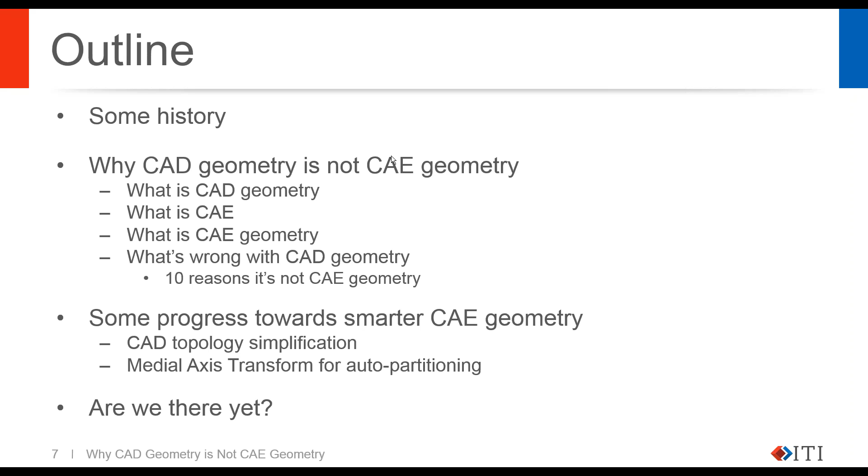Okay, so I've broken today's webinar into two parts. There's a mildly depressing first half where we'll go through all the problems that CAD geometry causes us, and I'll try to elaborate some of the reasons why. And then the second half will be a bit more uplifting, where I'm going to pick a couple of the areas of research and development that we're doing in CADfix to try and address some of these issues with CAD geometry.

And there's a lot of clues in the name there, because back in those days, a lot of the simulation was done in a single package. The modeling of the geometry was done in the same tool that was actually doing the mesh generation. And so in those days, CADfix was really quite good at creating very complex hex dominant meshes of geometries, as you can see on the screen here.

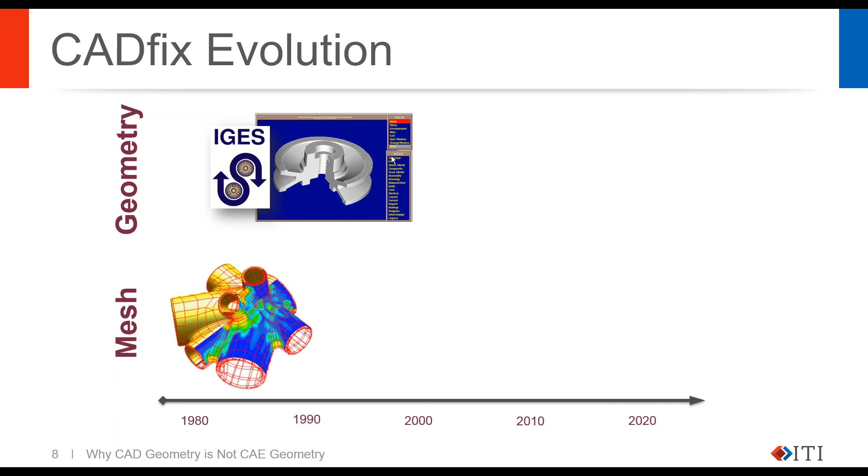But around the end of the 80s, early 90s, commercial CAD systems really started to take off, and geometry started to be created outside the simulation environment, and people were receiving geometry as IGES files or as native CAD geometry, and they had to do the simulation on this much more complex geometry. So the highly structured hex dominant meshing we were really focused on back in the 80s becomes very difficult to do as the complexity of the model goes up.

And so the industry as a whole tackled this complexity issue by switching over to automatic tetrahedral meshing for a lot of structural simulation. And so we did the same thing. We introduced tet meshing within our tools, but a lot of other tools were also coming into the market at this time offering automatic tet meshing. It was quite a straightforward technology to develop, and so we were starting to lose out on that front.

But what we had noticed during those years was that as CAD geometry became more and more prevalent, the quality of the CAD geometry was becoming an issue, and not just the complexity of it, but actually the integrity of it in the early years. And so at about the end of the 90s, we took a strategic decision within the company to change the direction of our product and switch over to more of a geometry focus. Initially, it was focused on developing algorithms for cleaning, healing and repairing CAD geometry to enable you to translate it or move it between different CAD systems.

But as years went on, the CAD systems improved that translation themselves. Their exports became better. STEP as a format came along. That removed a lot of the issues with translation. And so we started to decide what to do next. We still had this eye on the simulation market, and we could still see the simulation engineers were struggling with the geometry. Even though it was cleaner and they could get it into their system, they were still struggling to actually do the simulation. And at that point, we decided to invest in several strategic geometric algorithms.

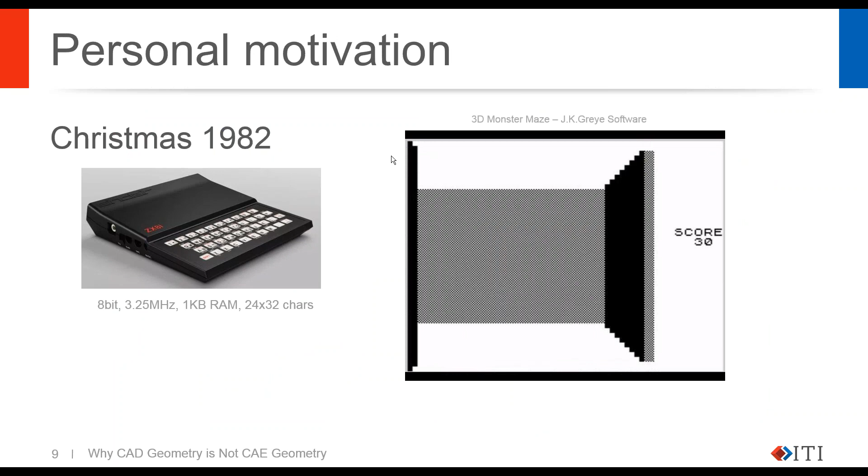Personally, I think my interest in 3D geometry and simulation I can trace back to Christmas 1982 when I got this, my first computer there, you can see on the left, and a game, 3D Monster Maze. And you can see that little animation on the right-hand side there. So that really sort of fired up my 15-year-old mind and really got me wondering, well, if computers can think in 3D, just what's the hardest question they could answer for me? And that really started my career in sort of geometry engineering and trying to get computers to do hard things. Okay, so that's a bit of a background.

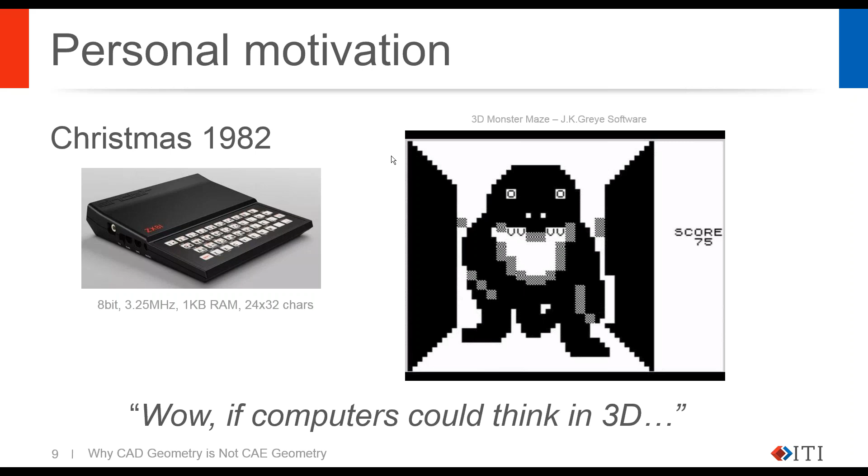So looking at the structure of the webinar, as I said, I've broken it into these two sections, and we'll have a poll in the middle where we can assess the first half and get your feedback on that. So before I sort of launch into describing the detail of the CAD geometry, I need to explain some of the terminology I'm going to be using here.

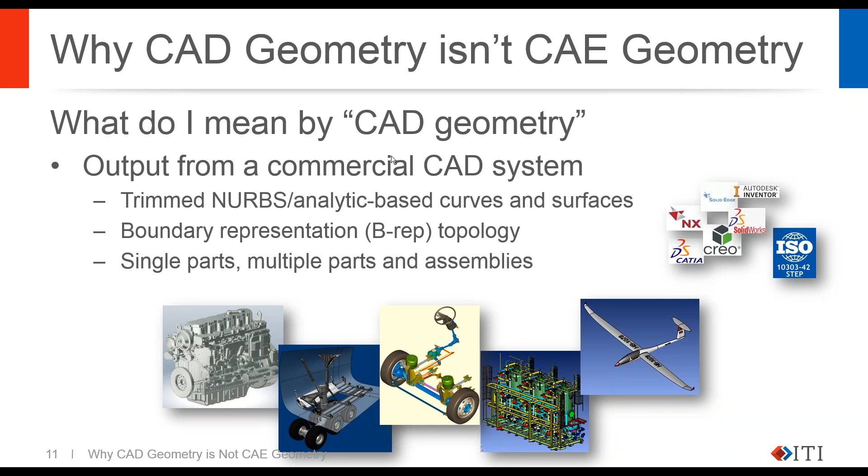So starting with the CAD geometry, what do I mean by CAD geometry? So for this webinar, I'm really talking about the sort of output you get from commercial CAD systems like CATIA, NX. So it's typically trimmed NURBS surfaces, curves. It uses a boundary representation to define the geometry. You find it in single parts, multiple parts, or very complex assemblies. So this is what I'm calling CAD geometry for this webinar.

Just to show what isn't CAD geometry for this webinar, because there are other alternative forms of geometry. So faceted surfaces, implicit surfaces, subdivision surfaces, untrimmed splines, and point clouds are all examples of alternative geometry forms that I'm not calling CAD geometry here. So just bear in mind that this is really commercial CAD software geometry that I'm talking about.

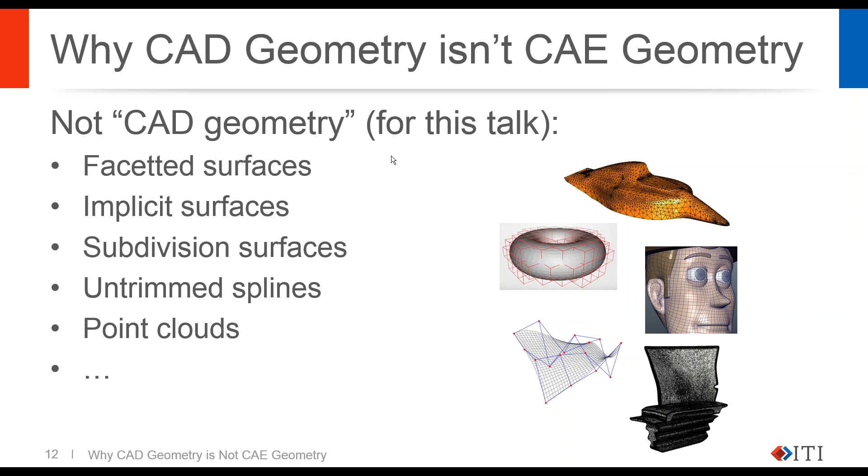So what do I mean by CAE? So this is a bit easier to define. So it's using computers to simulate any laws of physics, so thermal, stress, fluid flow, electromagnetics, and so on. So they all have this common theme that they typically start from a 3D geometry definition, and they require some discretization of that geometry in order to solve the physics that they're solving.

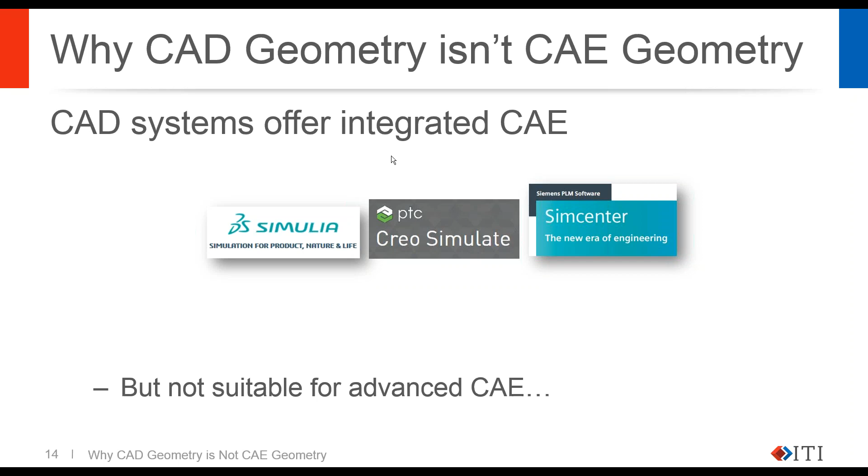So you might be thinking, well, CAD systems already offer an integrated CAE capability. So you can do some simulations within a lot of CAD systems. So I'm not talking about that sort of CAE here. I'm really talking about advanced CAE as being the thing that's suffering from this geometry. So what do I mean by advanced CAE? So I'm talking about any sort of CAE that's currently limited by either human resources or compute resources.

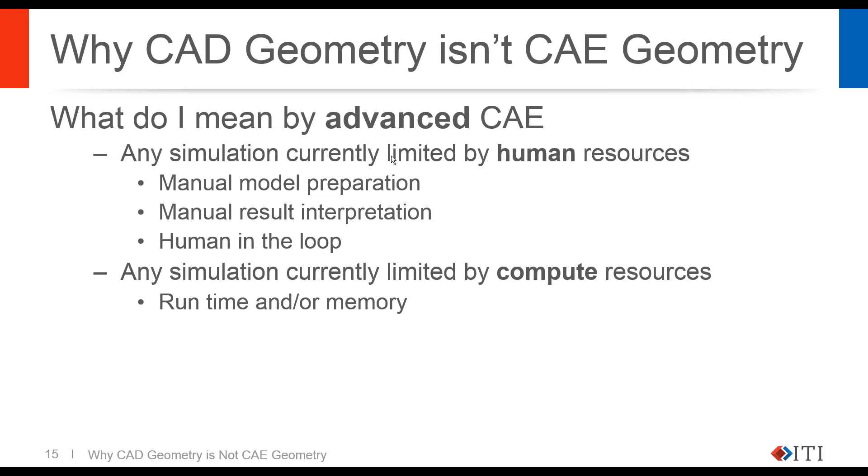So by human resources, I mean simulations that still involve a significant amount of human effort to prepare the model, so cleaning the geometry, meshing the geometry, or human effort to actually interpret the results and influence the design by interpreting the results of a simulation, or any other thing that involves some human being in the loop. On the compute resources, this is a bit easier. So any sort of simulation that is really currently restricted because it runs too long, it uses up too much memory. So some examples to put this into context. So jet engine failures are a very common example of what I would call advanced CAE.

So trying to simulate the fan blade coming off of the front of the engine, or a bird strike, or in fluid flows, so simulating transonic flow, shock waves, turbulence, or electromagnetics is another example. So trying to simulate lightning strikes, predicting the current flow across and through aircrafts, antenna performance, and so on.

So these are sort of things that I'm calling advanced CAE, and physically this is how they are simulated or tested today with expensive physical tests. A fan blade off on the left there, wind tunnel on the right for the fluid flow, some sort of electromagnetic test environment there on the bottom picture.

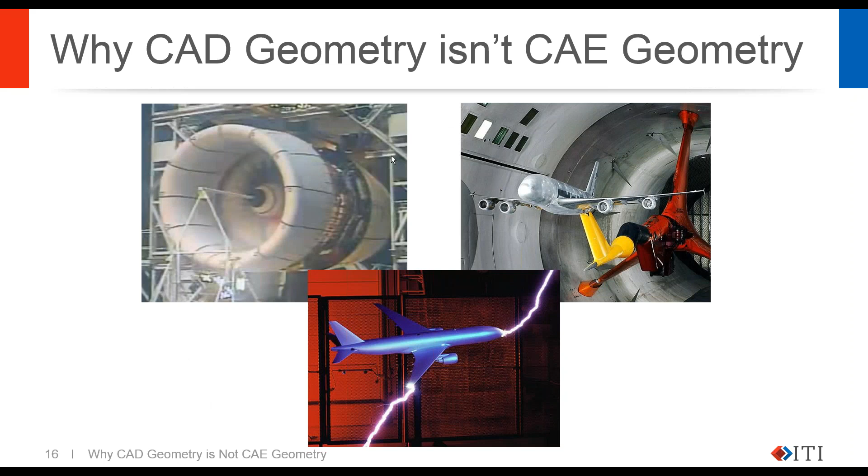So these all can be tackled today. There are solutions and simulations going on for these things, but they fail my criteria in that they're either limited by human resources. So, for example, the fan blade off model on the left there can take many weeks to actually produce an efficient model you can actually run for that simulation. And some of the CFD tools are pushing the limits of machine memory and storage and so on. So they are tackled, but they're not tackled to the level we actually want.

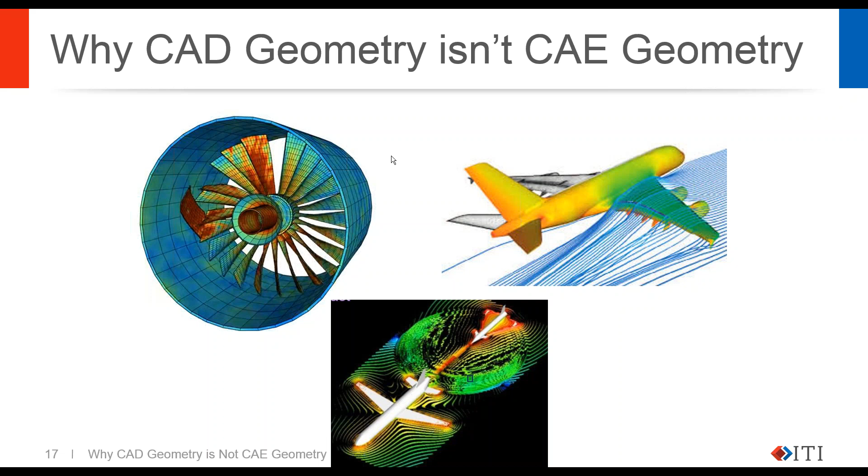Okay, so what do I mean by CAE geometry then? So CAE geometry is geometry that enables fast and efficient mesh generation. So there's a discretization problem that is common across all CAE. So this is the obvious requirement for a CAE geometry, is it has to enable meshing to be done very efficiently. But there's two other aspects of my CAE geometry that are important.

So adaptive mesh refinement is becoming a more important aspect of solvers these days, being able to modify the mesh as the solver converges on a solution. So in order to do that, you need to have the mesh coupled with the CAD so that you can actually refine the mesh directly on the exact CAD geometry. So that connection is a really important aspect of CAE geometry.

And lastly, once you've performed some simulation, you have some results in a mesh format, you need to be able to get this back into a CAD system for either manufacturing or for sharing through other workflows that typically expect to start from a CAD definition of the geometry. So true CAE geometry has to be able to satisfy these three criteria. Okay, so those are the terms defined.

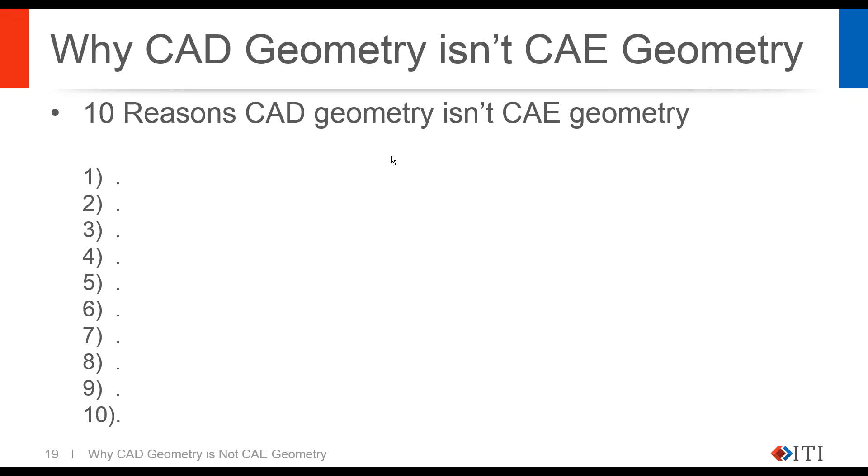So if we now start to move on to why is CAD geometry not CAE geometry, I've identified 10 issues here. But before I got started, I realized that actually there was an underlying issue, a zeroth issue that myself and others probably take for granted when they talk about working with CAD geometry, and that's that it's not geometrically watertight. So the way that the CAD solids are created today, they're defined as a patchwork of trimmed surfaces.

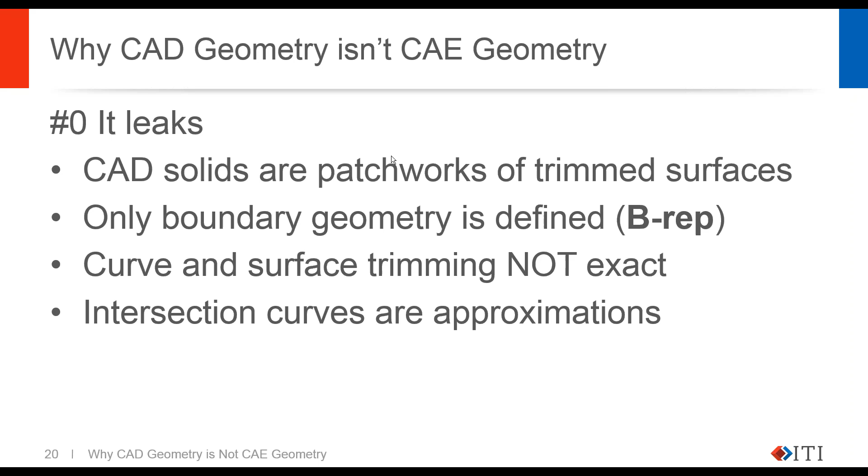So individual surfaces are stitched together to give you this sort of outer shell of your solid, and this sort of stitching process is not exact. So there are approximations involved in the intersections between surfaces, the trimming of surfaces and curves. So the end result is that the geometry is held together by a tolerancing system in one form or another. So it varies from CAD system to CAD system. But all these sort of junctions and joints between faces, they're held together by some tolerance or other.

So this is sort of an underlying problem, which for mesh generation you might not think is an issue, but actually when you start getting down to making very, very fine meshes, you can start to fall into the realms of these tolerances, and then your geometry starts to look a bit more like this from a meshing algorithm. So there are clear gaps start to appear between faces that your meshing algorithms then start to fall into and trip over and so on.

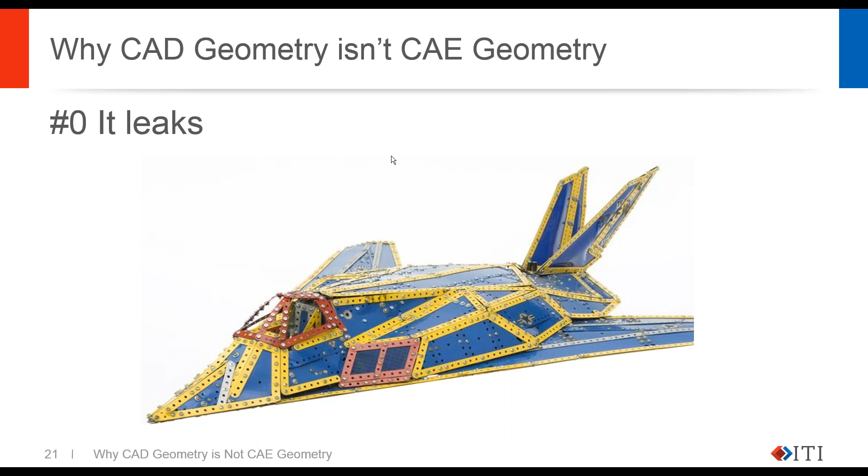So just bear this in mind as we go through the next problems, that this is underlying all of them, this robustness of the whole CAD representation. Okay, so moving on to number one, the first problem we've got. So I'm calling it a dumb solid.

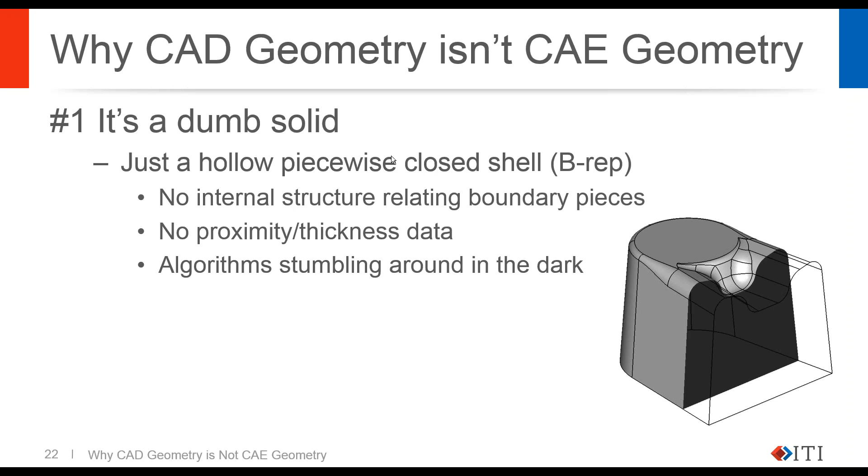By this I mean that the geometry of a CAD solid is only defined on the skin. So we only have curves and surfaces defining the outer boundary of your solid. CAD solids don't give you any information about the shape of the interior, the proximity of various parts. So if you're writing algorithms to walk around on the interior of a solid, then they're typically stumbling around in this dark area with only the outer surfaces to work with.

So this is a problem for CAE when you come to discretizing or meshing volumes, which is a very key activity. And algorithms that need to discover proximity do it in a very clumsy or expensive way by touch. So by firing rays, by detecting when collisions occur in the meshing process. So here's an example of this and how it affects the meshing quality.

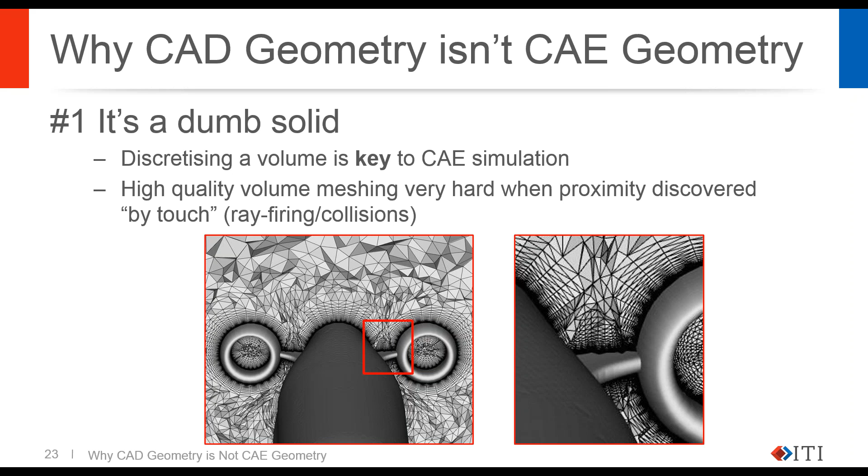And so typically you end up with some sort of compromise in the mesh where the structured mesh you want stops, and then this lower quality unstructured mesh leaks in to fill the gaps. So that's an example of the missing proximity, the fact that the solid is really quite a dumb solid.

So for these 10 problems, I'm going to highlight what I'm calling a CAE geometry challenge, this little red line at the bottom of the screen here. I'm going to pull these out, and we'll use them at the end to summarize the issues causing problems with the CAE geometry. So for this one, we need to have smarter proximity reasoning for CAD solids. We need better than just walking around the skin and firing rays to tell us where the thickness is and where the proximity is. Okay, so that's number one.

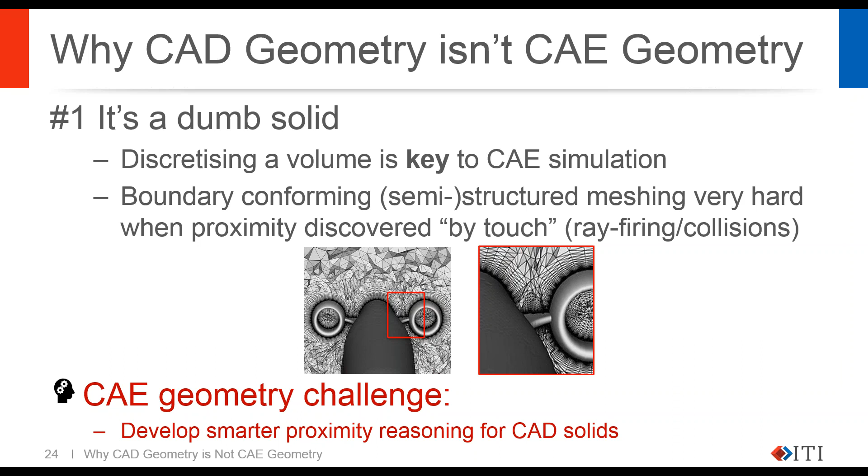So why does this happen? Why do we get this coming from the CAD systems? So there's a couple of reasons.

One of them is sort of going back to the way CAD systems interface with humans, and they tend to replicate the sort of human machining operations that we're all familiar with, so extruding, cutting, sweeping, rounding, and so on. And they allow you to compound these things together, so you can overlay all sorts of operations one on top of the other. And that is one reason why you end up with a lot of complexity in the skin, because of all the overlaps and interactions of these operations.

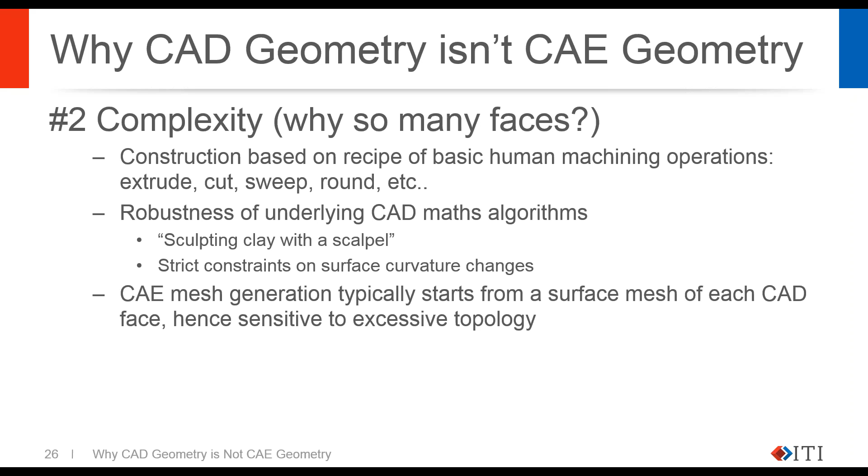And as I was saying, they influence the CAE process because of the mesh generation of the skin, often being very badly affected by the way that the skin is defined. So I can see a couple of challenges coming out of this particular problem. So being able to automatically simplify CAD geometry. That's something we've been doing with CADfix for many years, allowing our users to join these faces, collapse small edges and so on.

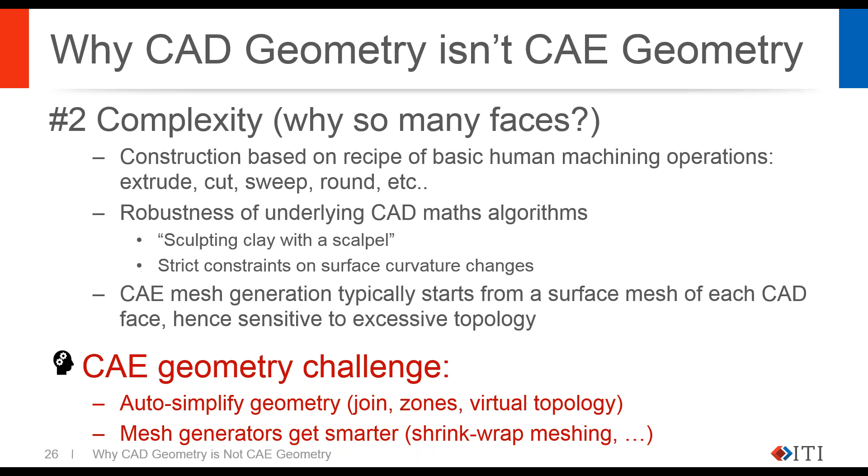And also we're now moving into non-destructive ways of simplifying the CAD geometry, so virtual topology, for example. So that's one way we can modify the CAD geometry. The second way we could do this is to actually make the mesh generators smarter, to actually get them to ignore a lot of these sub-resolution features, just automatically mesh over them. So two challenges from this one.

You have to extract that. You have to derive it from this very complex collection of bodies that are in contact. Some of them may be actually penetrating. Some of them actually have small air gaps between them, so it becomes very difficult to actually extract the geometry you want for your simulation.

Another example, given a single body, the body is represented in the metal, but you actually want to do the simulation of the airflow. So again, the actual geometry that you need to mesh isn't actually part of the CAD model. It's something you have to derive from that. So the challenge from this one is an automatic domain geometry extraction facility for very complex parts and assemblies.

Number four, the CAD geometry can be too realistic. This typically happens in CAD models that are very close to the end of their life. They're down at the manufacturing level where they're being produced primarily to drive the manufacturing process. And so typically they collect a lot of realism. They collect a lot of nuts and bolts and company logos and instructions, and very small, high fidelity realism features creep into this.

But they can cause big problems for the mesh generators, because they typically are below the sort of resolution you need for a simulation, or they're below the resolution you can afford. They would drive too much mesh into your mesh, and so you have to come up with a way of removing these. So there's a couple of ways I can see doing this. Automatically defeaturing the geometry. So again, stuff that we've been working on in CADfix for many years to try and give people tools for identifying and removing this sort of geometry.

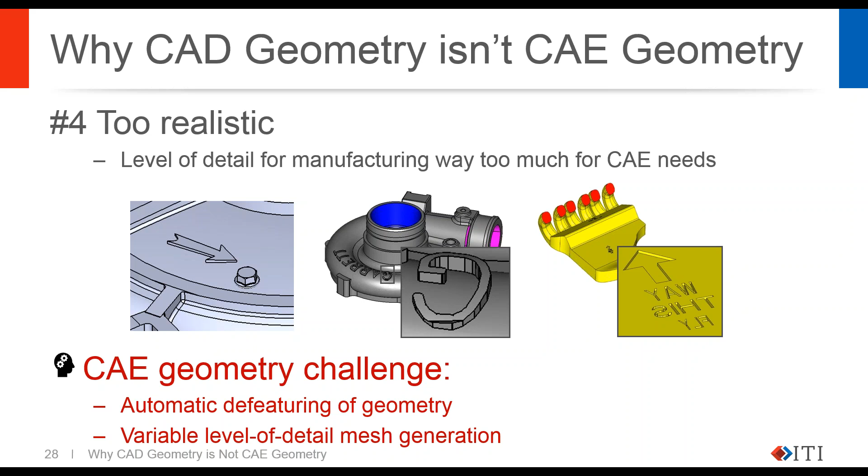The next one is the opposite, really, so too idealistic. This again happens at the other end of the design spectrum, typically with preliminary design models, early design models, where you don't want all that realism because you're not about to manufacture it.

This can cause problems with this sort of feature, where the geometry is constructed from more primitive type features, like cylinders and blocks, that you're gluing together. Because of the lack of nice fillets that give you realism, you end up with unmanufacturable features creeping into the CAD geometry.

The challenge for this one, I think, is really on the doorstep of the mesh generators, because I don't believe the CAD systems are likely to provide tools for this, since this is fundamentally correct - what you see on the screen is what the user asked for. So the mesh generators are the ones that need to cope with this sort of too-idealistic problem.

Okay, number 6, so no idealization. This is a special case where we have geometry that can be simulated much more efficiently if we can approximate it with a mid-surface mesh rather than a complete solid mesh.

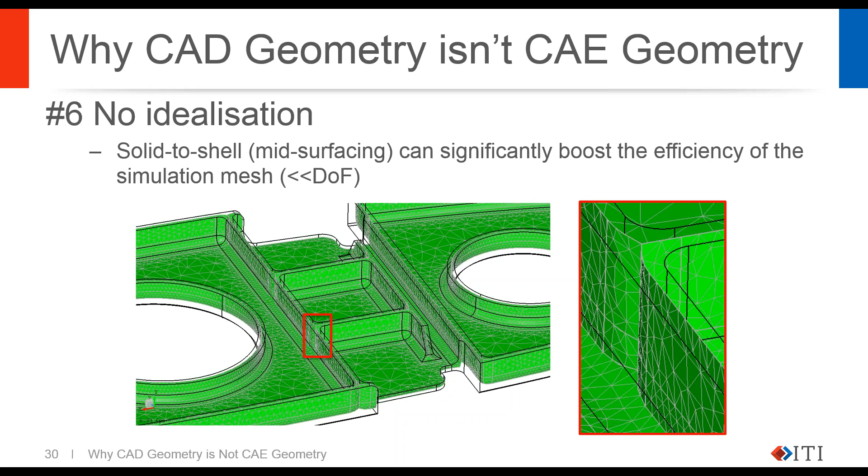The example on the screen here is a thin-walled aerospace component, which you could mesh automatically with TETs, but you'd have a lot of them. If you're able to construct a mid-surface mesh as an approximation, you can get a big speed up in simulation time, and the number of degrees of freedom drops dramatically. So it's a very attractive goal, being able to idealize solids into sheet approximations.

But the trouble comes back to the whole dumb solid problem again, in that CAD solids find it very difficult to reduce complex, or even fairly trivial, thin-walled objects into mid-surface approximations robustly. So there are tools out there that do this semi-manually, allowing users to pick pairs of faces and construct a mid-surface.

The user then has to manually stitch together the mid-surfaces. And where the thickness becomes variable, that becomes quite a challenge to construct a mid-surface. That brings a human back into the loop and breaks the whole optimization goal. So the challenge from number 6 is quite obvious - we need a way of automatically creating robust mid-surface idealizations from CAD solids.

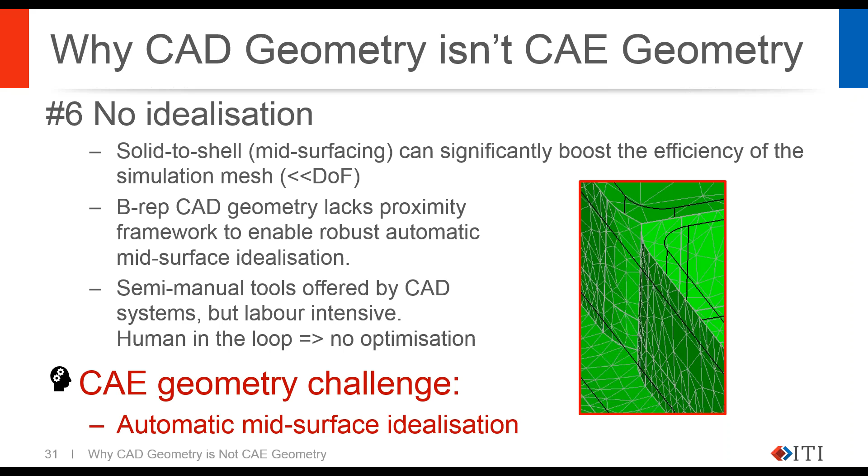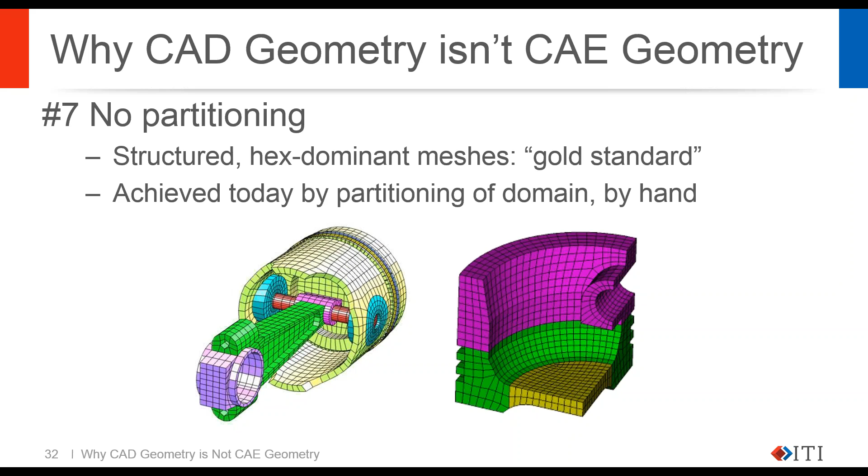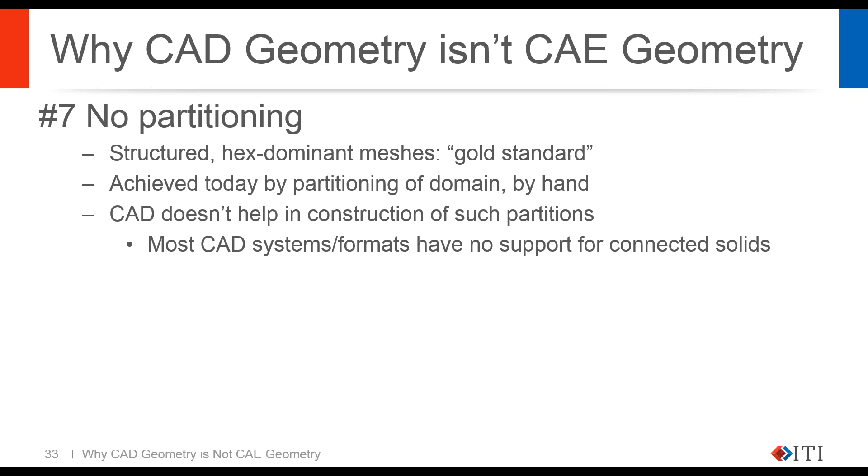So CAD geometry doesn't really support this whole idea of subdividing a single body into lots of little pieces. There's no support for this sort of connected multi-solid representation of a body.

There are specialist tools out there for enabling this subdivision, this blocking of CAD geometry, like ICEM Hexa and Cubit. They're very proficient at allowing users to sketch the blocks and construct this block topology quickly. Again, they're quite labor intensive and bring a human into the loop, so they really rule out any optimization goals you had.

So the challenge coming from this one is that we need to be able to automatically partition complex solids into hex meshable blocks. That's the challenge from this one.

So what we need here is the ability to reparameterize CAD geometry to give it handles, or optimization handles, to allow the optimizers to actually achieve or drive the correct geometrical functions. So if you think of the wetted area of a ship hull, for example, you might want to optimize or minimize the wetted area. That's not a parameter you can control in your CAD geometry, so you can't actually drive that up and down with a solver.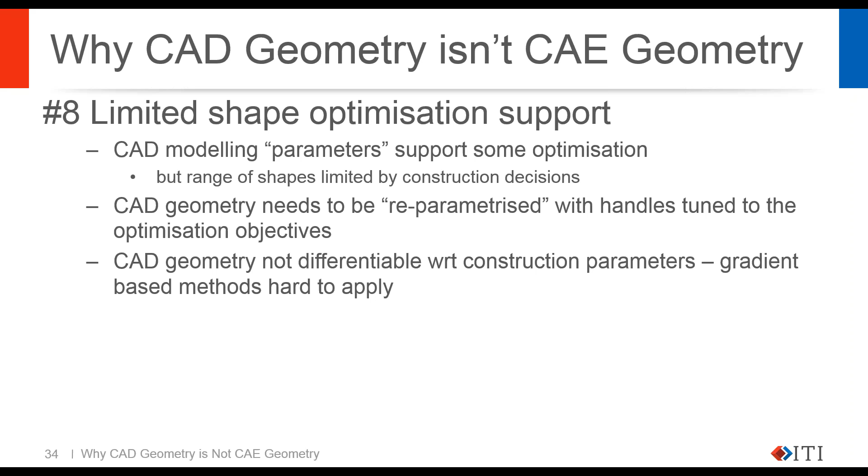Okay, the other sort of shape optimization relies on gradient-based methods, so adjoint techniques for using the relationship between the geometry and the parameters to home in on the optimum shape. So that requires that there is a connection between the derivatives and the mesh and the CAD geometry, and that is typically missing from most CAD geometry. It's another form of being a bit dumb.

So there's a couple of challenges I can see from this one. Being able to reparameterize the CAD model to give it the correct handles for the solver to actually start pushing the geometry around in a way that's going to reveal the optimum shape. And the second one is an adjoint friendly geometry engine, one the solvers can actually use for differentiating the relationship between the solution and geometry.

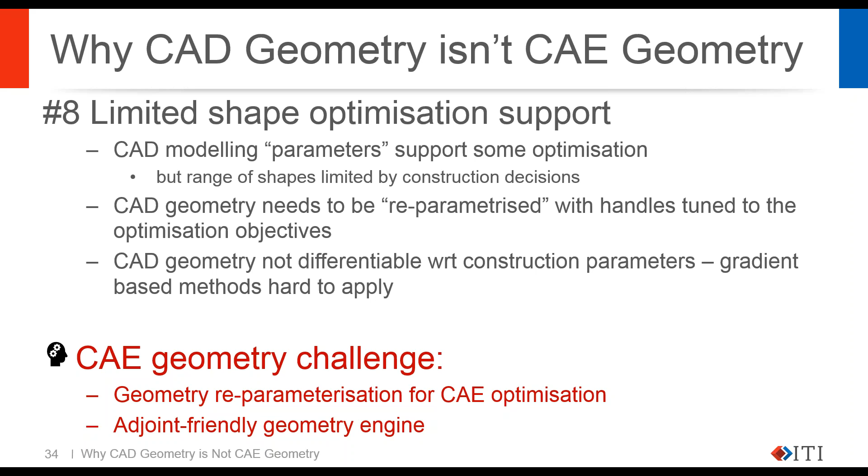So how do you integrate that into some of the more traditional CAE workflows, which are built around CAD geometry? How do you marry them together? So there's a challenge coming out of this one for the integration of scan geometry into our current CAE geometry workflows.

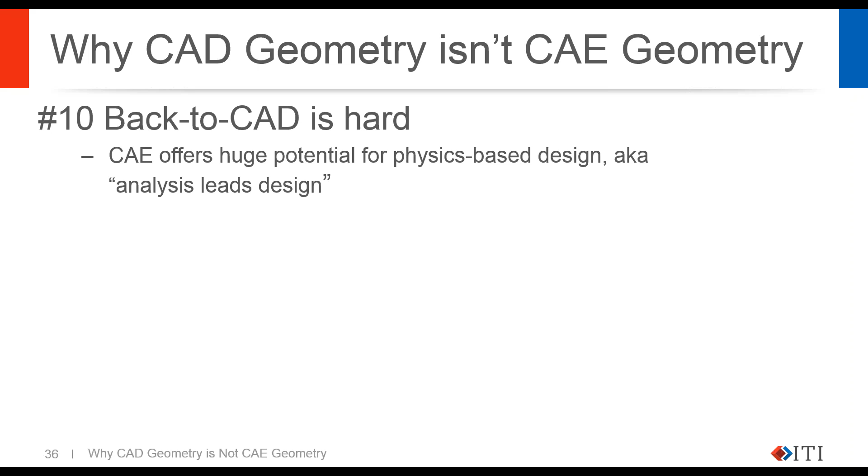So the last one of the ten, this is a back to CAD problem. So this is the shape optimization follow-on. As I was saying, CAE offers huge potential for doing physics-based design, so really homing in on the best design to solve the physics that you're trying to simulate. And that often ends up with very complicated meshes defining that shape.

So for example, on the left here, we have a simulation of a hot-to-cold turbine blade. The turbine blade is simulated in its hot running form, but it's obviously manufactured in a cold form. So you use a simulation to go from hot to cold. But the cold is defined as a mesh, not as a deformed CAD geometry. So there's a problem there. How do you actually turn that cold mesh into geometry that is good enough to put into a CAD system to manufacture?

And on the right-hand side, here's our optimized cooling hole again. The solver has been able to move the mesh around to find the optimum shape for this cooling hole. But how do you get that back into a CAD system again for manufacture, or into a format that you can share with another downstream workflow?

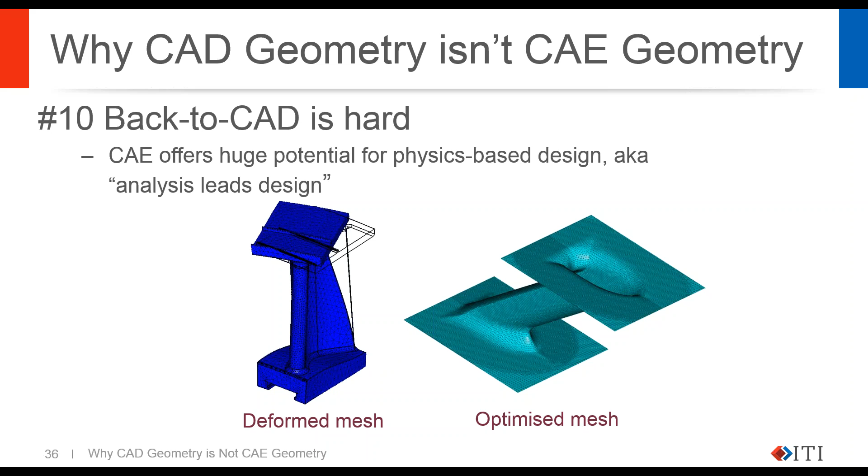Okay, so the problem here is that the simulation tools produce optimum shapes in mesh. They don't talk CAD BREP. They can't actually construct a BREP to describe their optimum shape. But CAD BREPs are the common denominator. They're the thing that allows you to exchange your designs very easily.

So there are a couple of challenges here I see. The first one, the hot-to-cold problem, you could imagine you've got a CAD geometry that's almost the right shape. So being able to actually just morph the CAD geometry to match the mesh is one challenge. But then in the other case where you have a very radically different shape, then you need to be able to construct valid CAD geometry from the mesh directly.

So there's a couple of challenges coming out of this one. That's the 10 issues with CAD geometry and why it's not CAE geometry.

Summarizing those, of all the challenges I pulled out, there's 13 of them across all those problems listed here. So I picked out 5 of them as ones that are particularly top priority for us at CADfix, and some of these I'm going to be talking about in the second half of the webinar.

But I think at this point, Marco is going to launch a poll to see if we can get some feedback on the relevance of these challenges. Yeah, let's get our audience engaged here. I'm going to launch a poll. Go ahead and get that on the screen.

Here you go. What we'd like you to do is, from the 5 top challenges that Mark identified, pick the one that's most important to you out of this list. And if you really have a pressing challenge that we didn't consider in this top 5, we would love for you to also send that to us in the Q&A window, and we can discuss that topic more when we hit our Q&A session here at the end. I know a lot of you submitted challenges as you registered, but if you want to, now that you've heard this material, send us anything else in the question window, feel free.

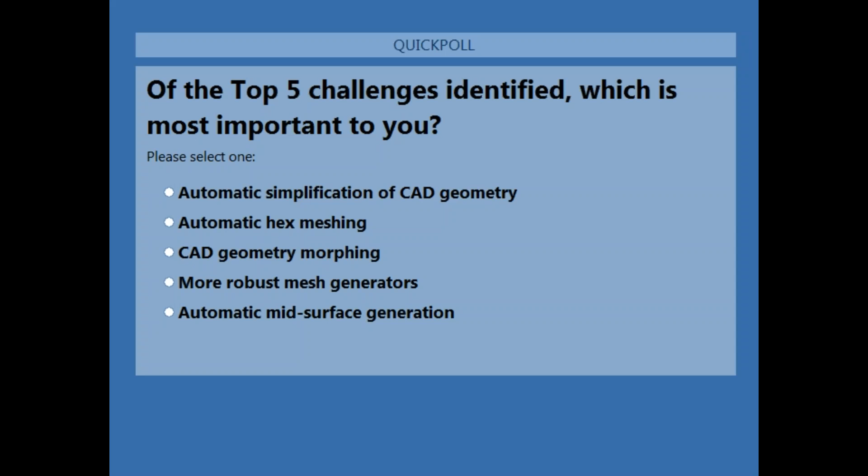All right, so here's our results. 62% of people agree that automatic simplification of CAD geometry is their biggest challenge, followed by 24% with automatic hex meshing, 10% CAD geometry morphing, and just 5% with the more robust mesh generator.

So that is very encouraging actually, that we do seem to have the right order at least. Yeah, so that's really good. I'd be looking forward to seeing any additional challenges that we hadn't referenced or hadn't considered in the Q&A session at the end. But that's really good to see that we're talking about the right things here today.

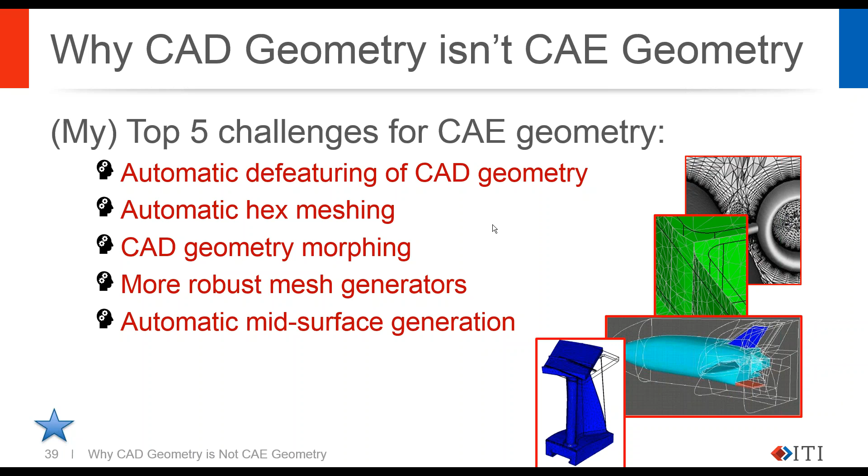Moving on to the second half of the presentation. So we have these 5 challenges I picked out for you to vote on. But in terms of what we're focusing on at CADfix, there's a slight difference. We have those 5, but we also have this second one that I introduced, which is tackling that dumb solid problem: how do we get some proximity data into these CAD solids to allow us to do some sort of smart 3D reasoning? So that's one I'm going to be talking about today.

And actually these top 3 ones are the ones I'm going to show you some of the research and advances we've been doing in recent years.

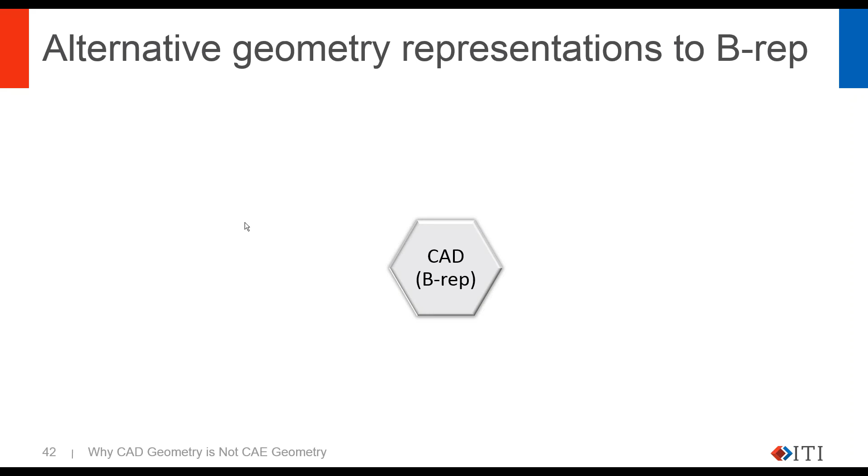But before I get onto that, you might be thinking that if CAD geometry is causing such a problem, why don't we just switch to a different representation? Why don't we just stop using all these trimmed surfaces and use something that's better suited for simulation? So just to look at that question, if we look at the other alternative representations that are in use today for various things, then we can see there's faceted geometry.

That's very common, so STL files, for example. Spline geometry - this is sort of the beginnings of CAD, the early days of CAD was spline geometry, but it's now coming back again with a lot of active research in academia to do with isogeometric analysis, a lot of spline volume for simulation.

Subdivision - this is very popular and very significant in the movie industry. So for animations and CGI, the geometry is nearly all held as a subdivision representation, not a B-rep, not a CAD solid. Point clouds - so with all the scanning data now available, point clouds are becoming quite a dominant form or a dominant source of geometry.

And implicit geometry - this is the sort of thing that is underneath topology optimization tools or generative design tools that are becoming more active in the last few years.

They're typically based on a different type of geometry called implicit surfaces. And then the last one is a CADfix special. So this is a representation that we've been working on for many years. It's called the medial axis transform, and it allows you to represent a solid by defining the skeleton and a thickness variation. So it's an alternative way of representing a solid. So there are alternatives to the current CAD geometry out there.

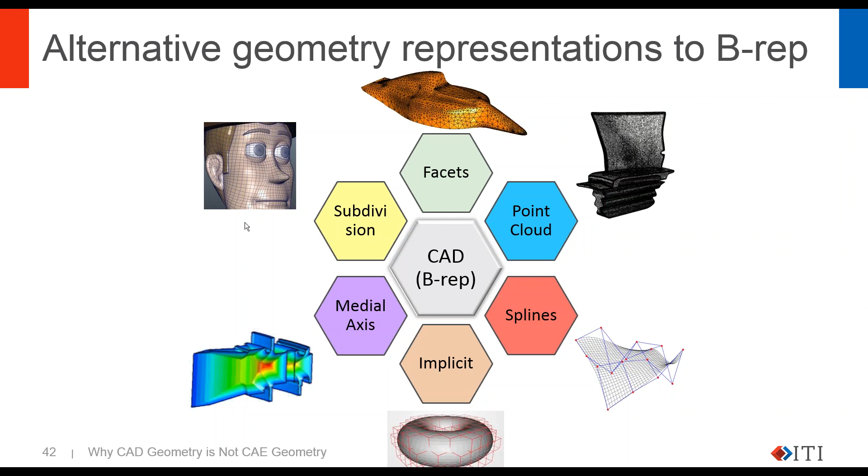So if we look at applications and what applications do we have that actually use the geometries and what geometries do they use, then we can see that facets are very versatile. So they're used a lot in these technologies. So gaming, VR, today's CAE, manufacturing, shape optimization. These applications typically don't work directly from the CAD geometry. They always convert that into a big pile of triangles, and then they start manipulating the triangles as their representation of the geometry. So these applications are already sort of one step away from the CAD geometry as their truth.

Point clouds, so there's a lot of point cloud data being generated from medical scans, geological scans, QA and test type measurements. So there's a lot of geometry being produced that never goes near a CAD system at all. Splines, I've mentioned these are sort of more academic research, but they're looking promising for some of the future CAE capabilities, so the isogeometric analysis I mentioned. Implicit surfaces, so these are becoming available these days in generative design tools, shape optimization tools. They're using implicit geometry. They're not using any sort of CAD geometry.

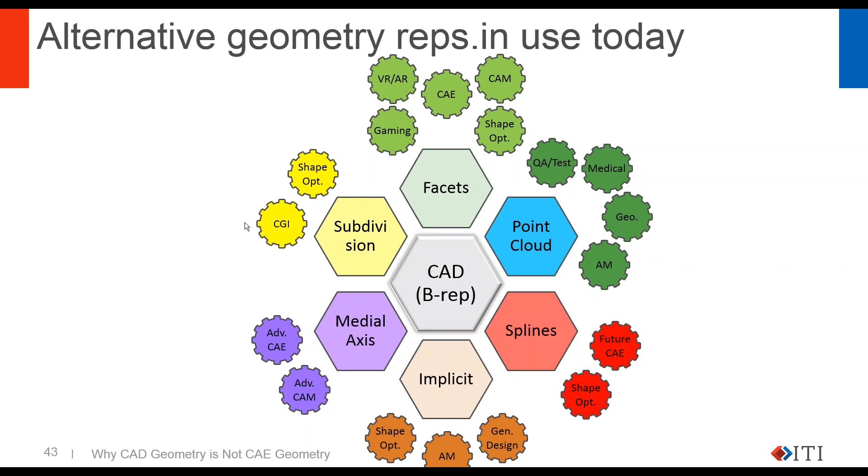So medial axis, again, is a CADfix special. So we're using this to power a lot of our advanced CAE and advanced manufacturing geometry operations that I'll show you some of later on. And subdivision, of course, is big in the movie industry. CGI is based a lot on subdivision, but it's now starting to also find a use in shape optimization. So there's a lot of alternative geometries out there, and most applications actually use an alternative representation rather than the CAD geometry that was created for them.

But the tricky ones are the missing ones. So taking facets back into CAD, that's hard. General point clouds back into a CAD model that you can actually get into a CAD system is hard. Implicit surfaces, so the sort of topology optimization results that we see, those things are also very difficult to get back into the traditional CAD format. So there's a lot of missing transformations here which gum up the works really and stop you from moving your geometry into whatever format is the best one.

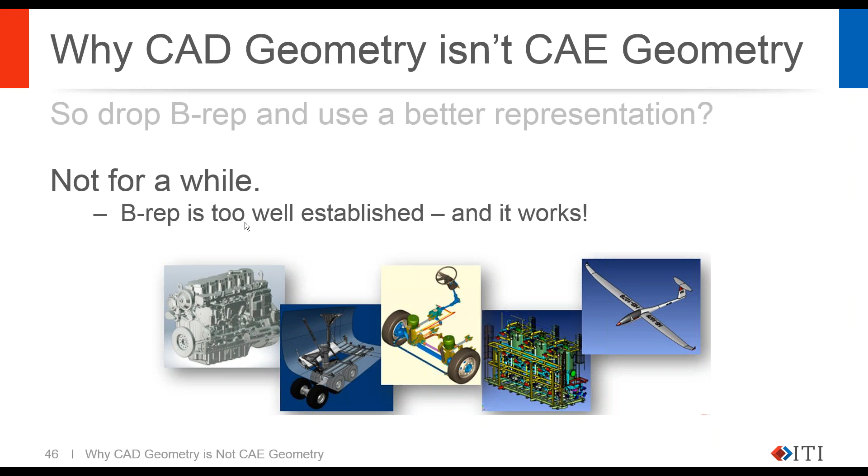So are we going to be replacing CAD B-reps? I don't think so for the near term anyway. Primarily, it is very well established and it does work, as you can see by the growing complexity of geometries that the CAD systems can produce. It is a very effective way of defining a 3D geometry.

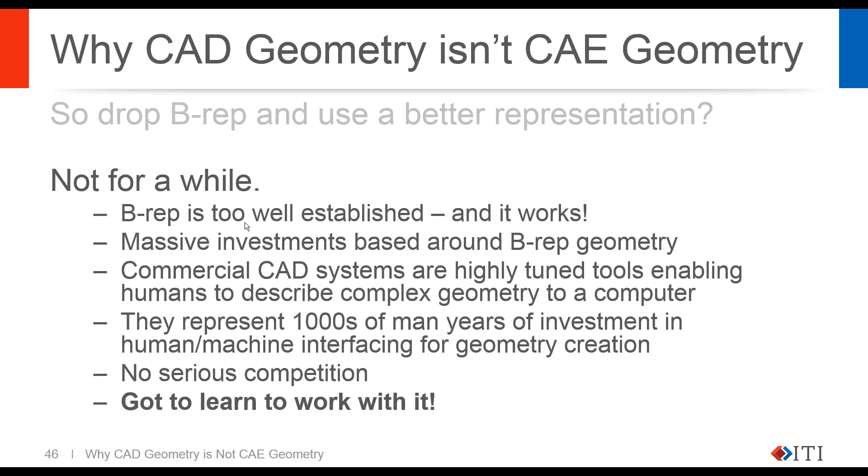So in conclusion, I think we are stuck with CAD geometry as it is today. There's a lot of legacy data. There's a lot of systems that are built around this. So the view we're taking at CADfix really is that we've got to learn to work with it. We can't just say, oh, throw it all away and use a new system because it solves all your problems, because you break all these rules that we've got here.

Okay, so that answers the question of why don't you just change the problem and switch it to something else. So let's move on to the second half of the problem then. So we're back onto traditional CAD geometry, and these are going to be a couple of topics on how CADfix is trying to address some of those issues that I highlighted.

So I picked out two of them. So the simplification one is the first one, and then the partitioning, so the thing that enables auto hex meshing, is the second one. Okay, so looking at the complexity one, so this was problem number 2. So why do we have so many faces defining our CAD geometry, which then upsets the meshing?

So just a bit of background again as to how meshing typically works. A lot of mesh generators have this bottom-up approach, where you create your mesh by first meshing the vertices from your CAD model, then you mesh the edges, then you fill the interior of the faces, and then finally you fill the volume.

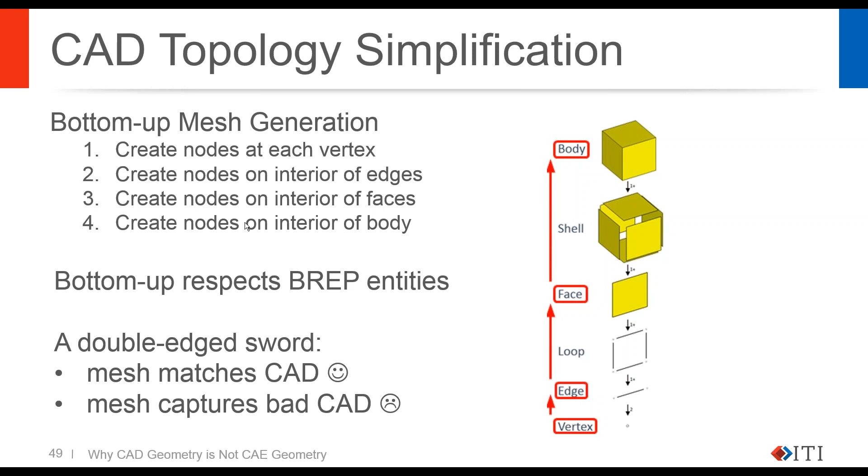So this is a double-edged sword, really, because in one respect, you're exactly meshing the CAD geometry, so you're capturing the exact shape that was the design. But on the reverse, if the design or the CAD geometry contains any sort of nasty features, then they typically are forced into your mesh.

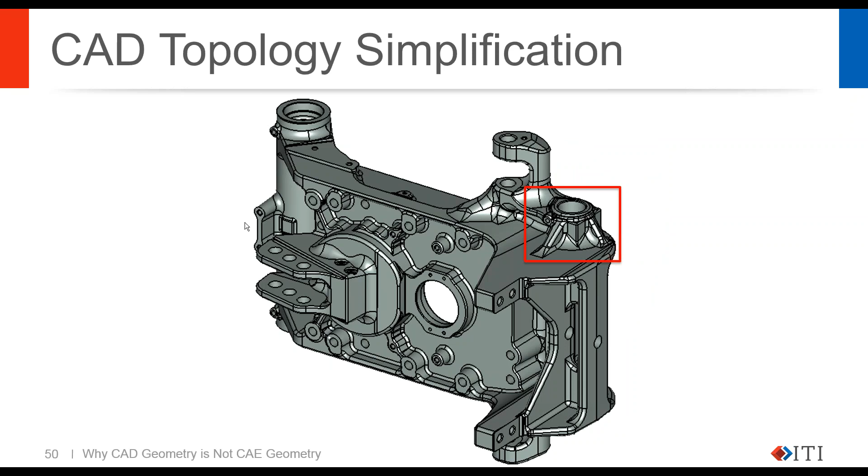So here's an example, a complex object here. If you zoom in on this top right-hand corner, we start to see the same sort of features that I was showing on the other one, where a lot of compounded modeling operations have resulted in a lot of faces, a lot of short edges, a lot of nasty-looking slivery faces appearing in the geometry here. So if you were to apply a standard meshing algorithm that would mesh each face one by one, then you would typically end up with a mesh that may look like this.

And if we zoom in on that top corner, we start to see these odd hotspots of dense mesh appearing in the geometry, which at first glance you might think, oh, there must be some geometrical feature there, some small step or some hole or something that requires that mesh in order to resolve the physics. But actually, when you zoom in on these hotspots, you find that they're there because of the very short edges, the very small faces, forcing the meshes to put small elements in there.

And then because you can't, or you don't like to have big jumps in mesh size, you have to gradually dissipate that small mesh out across the rest of the object. And hence you get these hotspots, little clusters appearing, driven purely by the fact that the skin was fractured up by the CAD system.

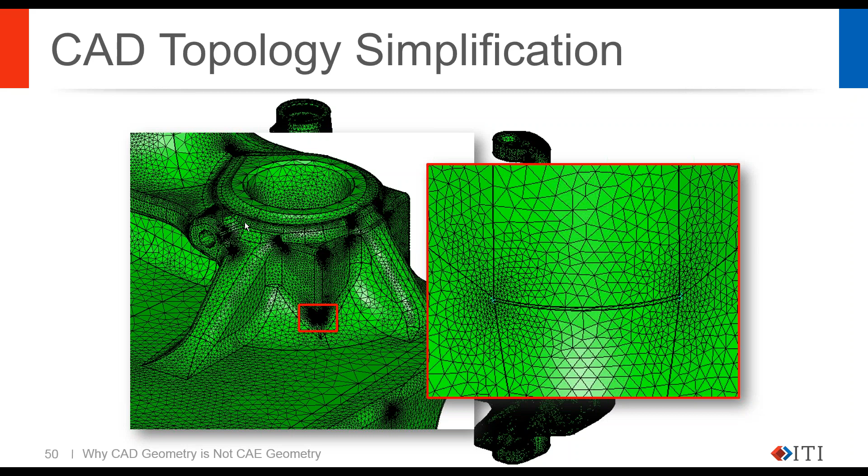So that's the problem. Just expressing it another way, if you were to take a cube and look at the cube, it has 12 edges, 6 faces. This is a unit cube, so the shortest line is length of 1. But if I was to split 2 of the faces, I still have a cube, so the volume is the same, the surface area is the same. The number of edges has gone up, now we've got 17. The shortest edge has dropped by half, we're down to 0.5.

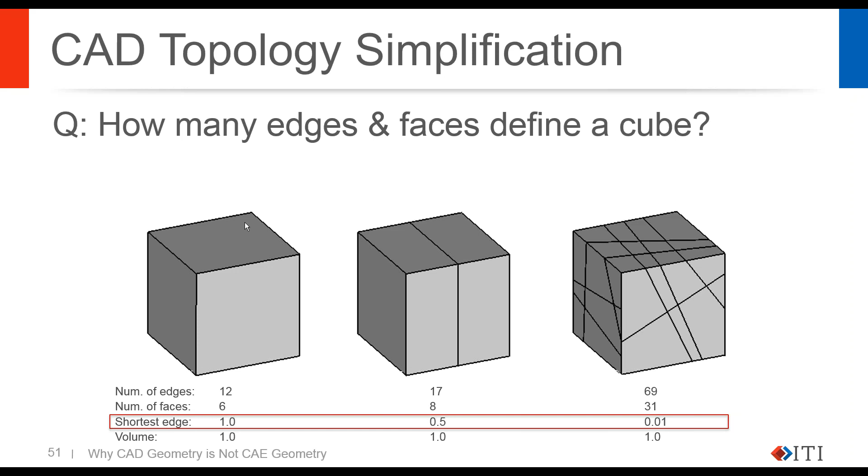And if you continue that, you go crazy on the faces and chop them all up, you can end up with something like this. So we've got like 69 edges. But the key one is the shortest edge has dropped by a factor of 100. So if you remember, this is the sort of thing that drives the resolution in the mesh. So this is a big problem when you have the fracturing of the topology when the shape is the same. It's still a cube, all 3 of them are a cube.

So the approach we're taking within CADfix is to implement something called virtual topology. This is a concept which came from academia about 20 years ago, and it's been implemented in a few other systems. But basically, it involves grouping together faces that you would like to treat as one face. So it's easy to see on my cube example what I mean here. The faces that I split up, if I could logically group them back together again and say, actually, just pretend these 2 faces are one face of my cube, and these 8 faces over here are one face of my cube, then the cube starts to look like it did before, which is 6 faces.

So the goal of this work in CAD is to try and modify the topology, the number of faces, number of pieces in the boundary, to simplify it down to the bare minimum, to make it as easy as possible to mesh.

Okay, so to do that, we need a couple of things. So if we group together a whole lot of faces, like on the left here with this car body, in order to be able to treat that as a single surface, the surface needs to have some sort of embedding geometry that gives it its 3D shape. And it also needs to have a parameter space that allows the meshes to walk across this very large compound surface that we've now created. So we need to have two things if we're going to make these virtual topology regions work for our meshing.

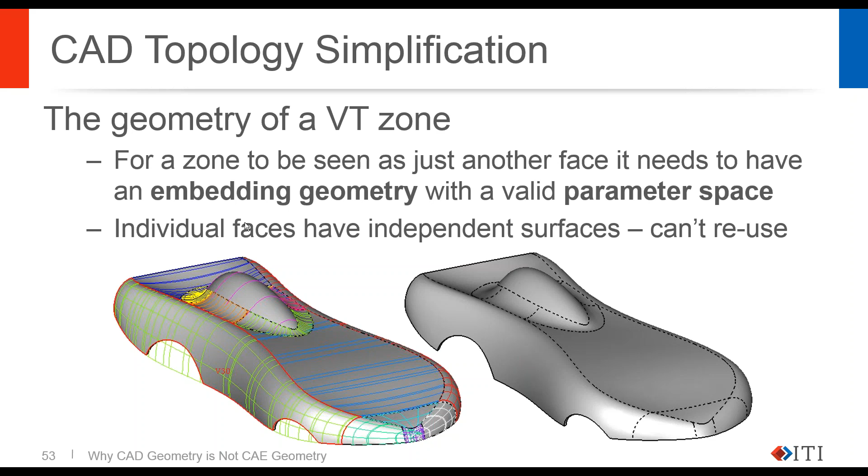So solving the first one, how do we get the geometry underneath a collection of trimmed surfaces? So the approach that we've taken in CADfix is to create a triangular mesh on the CAD surfaces, stitch them together so the triangles are watertight, there's no gaps, so there's none of that tolerancing problem that you get with the CAD geometry. But we've also gone for using cubic or curved triangles, so we're able to get a very low facet count for the surface, but at the same time still capture to a user-controlled tolerance the main shape of the CAD geometry. So that gives us a replacement surface that we can put underneath our zone, our virtual topology zone.

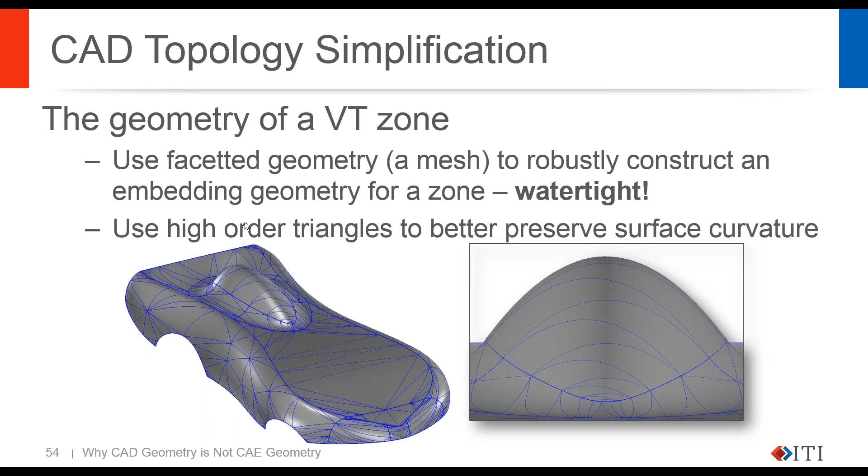So we need a parameter space. So the best way to show what a parameter space is, is to show how it works on this example here. So here's our complex part of our model again. We group together all those faces and we form 373 of them into one virtual topology zone. And the parameter space you can think of as being a quad grid, a piece of graph paper, for example, that you lay over the top of this collection. And that grid mustn't self-intersect, it mustn't fold, otherwise you can't mesh it.

So there's the challenge. The more faces you group together, the harder it gets to lay out this quad parameterized space onto that geometry. But this is one of the areas where there's been a lot of advances in the computer graphics community, and we've started to adopt some of those techniques to allow us to unravel the 373 faces. We can lay them out into a parameter plane where there's no overlaps. So our quad parameter space on the left there has no intersections, no overlaps, and so it's valid as far as a mesh generator is concerned. And that's all you need to start meshing on this sort of simplified geometry.

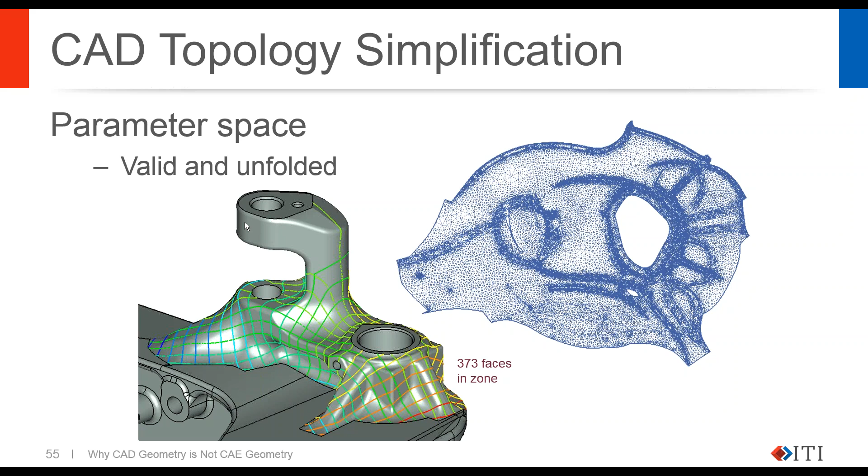So here's some results then. Going back to the original case, there's the first mesh with all the hotspots showing up. Once we put all those 373 faces into one zone, parameterize it, and remesh it, then we now have this sort of mesh going on. So if I zoom in on one of the particularly nasty corners up here, you can see the dotted lines are the original CAD edges and the CAD faces. And you can see the mesher has simply meshed over them as if it didn't even know they were there. But it has captured the curvature and the shape of the original geometry. So we managed to preserve the shape, but we managed to ignore the topology that was causing so many problems.

So just one other small point on this: you might be worrying that actually we're not meshing the real geometry anymore, we're meshing this triangular approximation, but those triangular approximations actually contain pointers back to the original CAD face they were made from. So the mesh you see on the screen here is created exactly on the CAD geometry, because we can project the mesh back onto those original faces to guarantee that the mesh is exactly on the designed geometry.

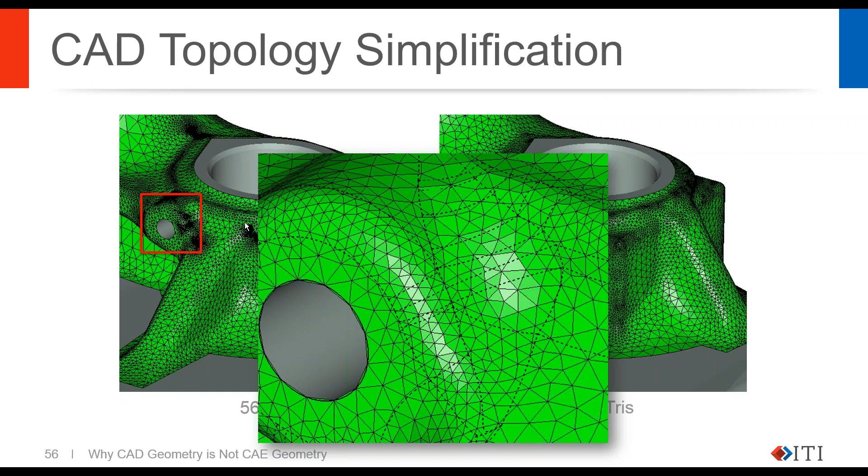So I think the takeaway from this first little example of our technology is really that the CAD geometry doesn't have to be trapped by this straitjacket of CAD topology. You don't have to do destructive collapsing, joining, modification of CAD geometry all the time. It still has its uses, but actually what you really want for automatic meshing is to be able to avoid all that manual intervention and automatically mesh over these sorts of small faces. So this is what we're hoping to achieve with this sort of technology I've just shown you, and it's looking really promising. Okay, so that was the first one.

How do we tackle the simplification problem? Looking at the second one I wanted to show you, this is partitioning and tackling the auto hex problem. So for this one we're tackling two problems at once really. So we believe you can't do the automatic partitioning without having more proximity data.

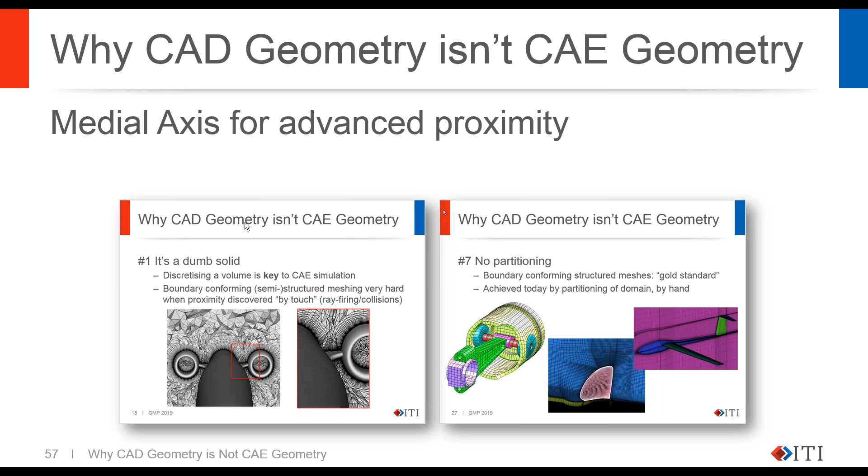So something to solve the dumb solid problem coupled with something to actually create automatic partitions. So we're tackling these two problems here. And I've mentioned this medial axis geometry earlier on, so I've got a couple more slides just to introduce this so that you're aware of what it is.

But you can think of the medial axis as being like a skeleton representation of a CAD face. So the two examples on the top right there are individual faces, and the purple lines are the medial axis geometry. So the medial axis, by definition, is halfway between the two closest boundary regions. So you can see how those purple lines are always halfway between the two closest black lines on the outside.

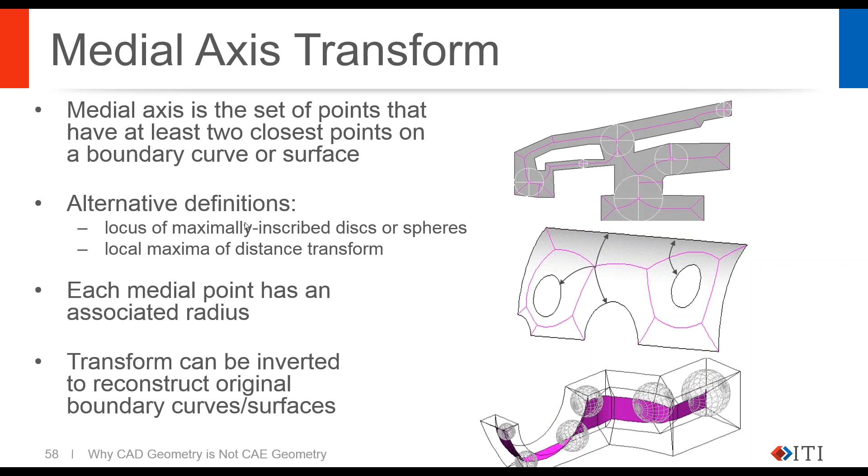And in 3D, it's the same concept, but you end up with a sheet geometry representing the medial axis. So that's that purple ribbon running through the middle there. Each face on that ribbon there is exactly halfway between two of those outside faces of your CAD model. So that's the medial axis in its simplistic form.

Here's some examples of it actually being used on some geometry that might actually help. So we can compute the medial axis on the interior of an object, as you were just seeing on the previous slide, but we can also compute the medial axis of the volume around the object. So on the right-hand side, we have that simple solid there.

If we compute the medial axis of the air around that, then we start to learn about the shape of the air around that object, and that's very valuable proximity data that we can then use for blocking and discretizing and partitioning that air volume around that object.

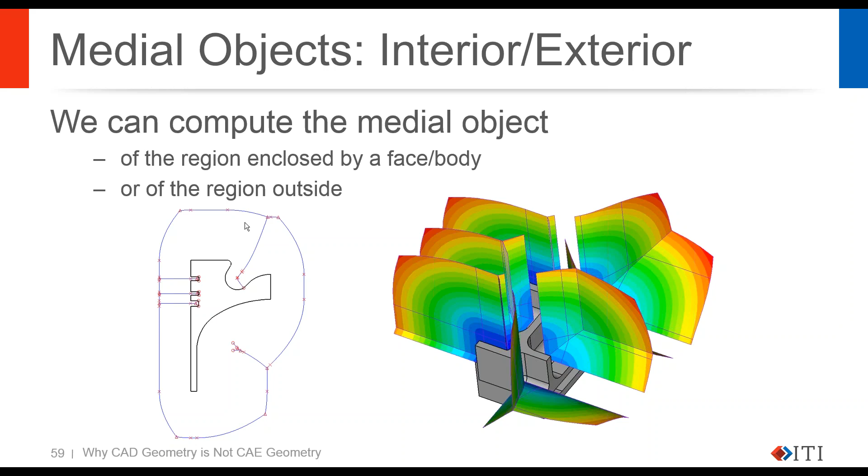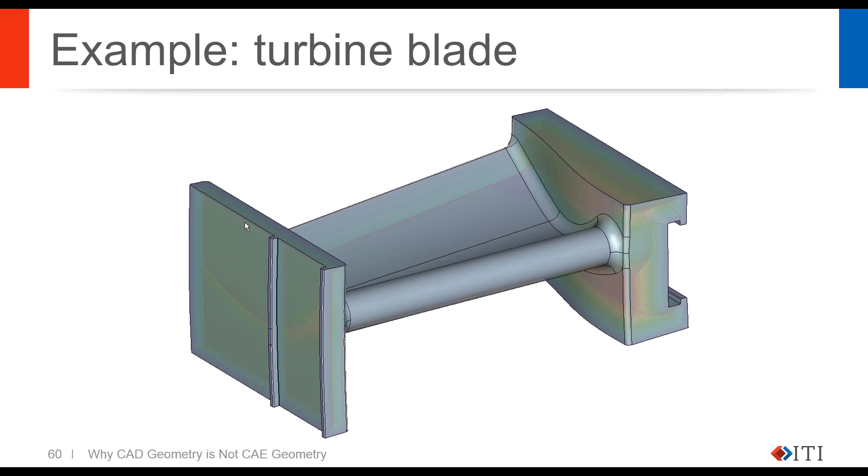So just a couple more examples of the medial axis on real models, again, to sort of confirm what you're looking at here. So here's a simplistic turbine blade, a single solid body, and here's the medial axis geometry that we've computed from that. So the geometry you see on the screen here is halfway between most faces.

And in the bright red areas, this is the thickest part of that turbine blade. And the medial axis geometry carries this thickness property. So at any time you can say where are the two closest outside faces and how far apart are they. So you can see how this really fills that question about stumbling around inside a solid, not knowing where the nearest walls are. This tells you exactly the shape of the interior of every solid or every air volume.

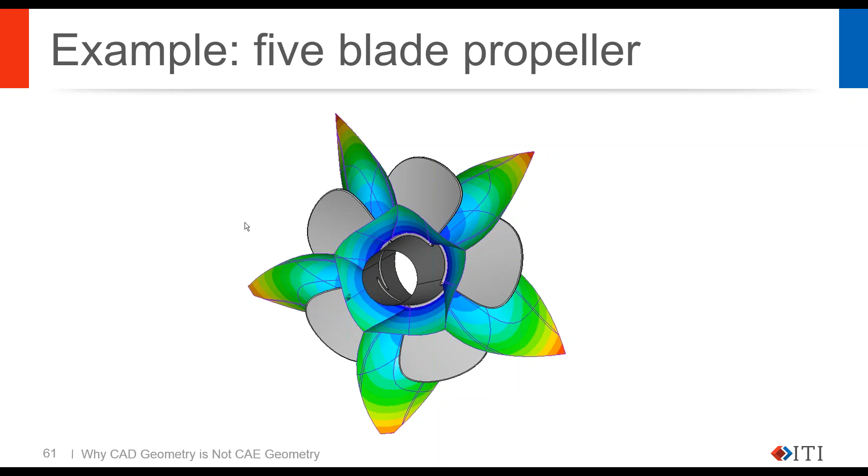And here's just one more example of an external fluid flow example. So a propeller, the fluid, the water volume around that, if you compute the medial axis of that water volume, then we get this sort of medial axis. So again, you can see the way that it gives you this sort of halfway bisector between the two closest parts of a CAD object,

but it also gets quite complex when there's no obvious halfway point or there's no obvious opposing faces. Then it still gives you an answer. It still tells you the proximity of that and the shape of that region of space. So it's a very, very rich source of 3D geometry.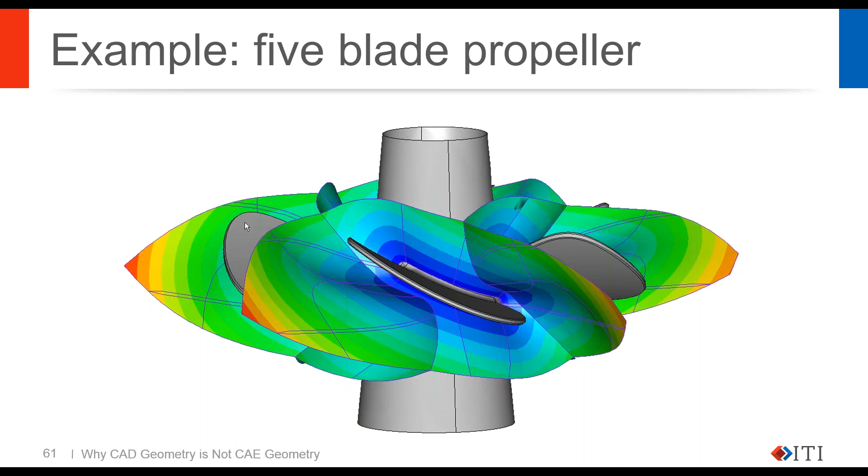So this is difficult to achieve if you're using a tet meshing approach, because getting the tets to be very structured close to the skin is a challenge. And also manually blocking it up is also not a very good answer, because you've lost that optimization possibility there. You've got a man back in the loop.

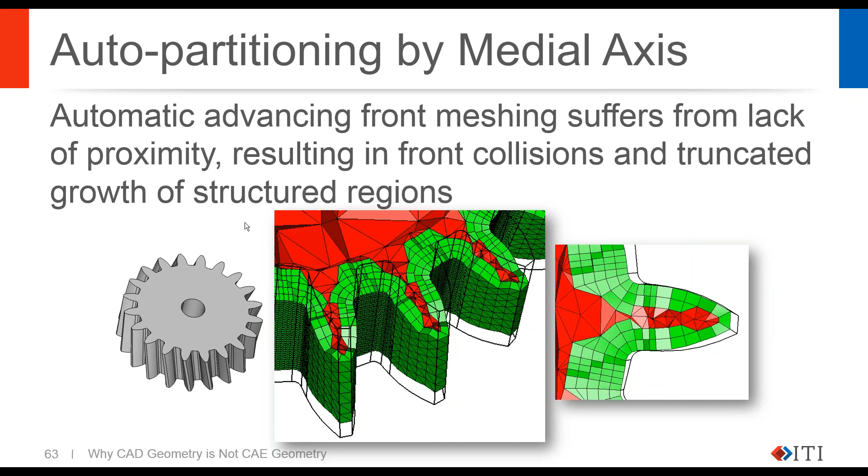The collisions are too complex to be able to resolve, and so the mesh algorithm typically stops at that point, and the far field unstructured tets in this case then have to sort of leak in and fill the gap that was left behind. So you're sort of degrading the area that you actually want to have the best mesh because of the collisions and the problems with the mesh generation.

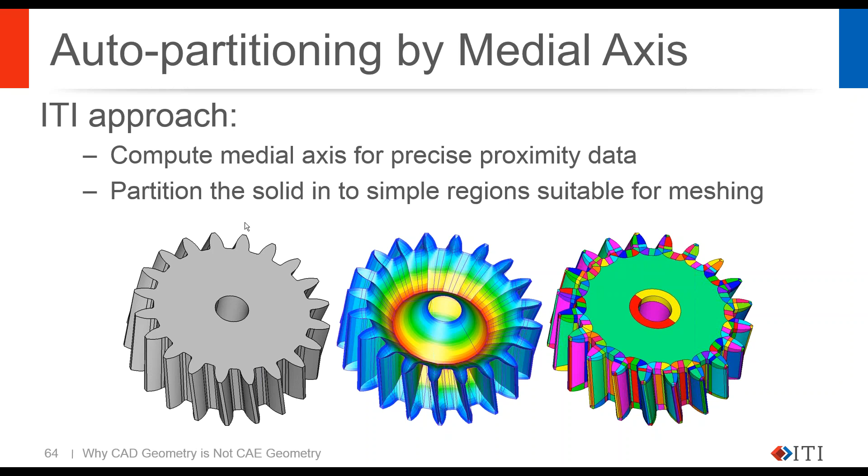So if we zoom in and have a look here, you can see the offset, the depth around the top of the object is quite constant. But then as you get into the teeth, where the opposite distance is actually beneath what we're asking for, then the medial axis gives you exactly where that collision front is. So you can guarantee to create the blocks and join them together without worrying about how to resolve those collisions.

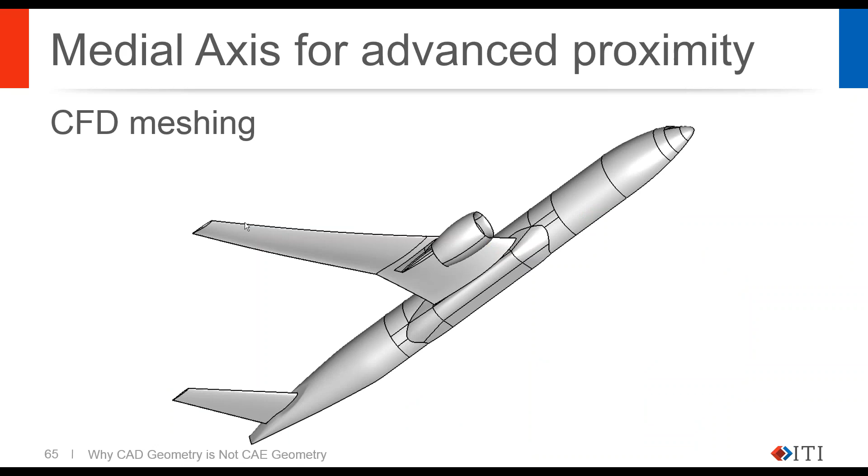Okay, so that's one example of using the medial axis to solve the proximity problem in order to get to auto partitioning, and in this case a hex dominant mesh. So the last example is doing this on an air volume. So CFD meshing is particularly keen on having very well controlled structured mesh close to the skin of your aircraft. And so there's areas on an aircraft that typically always cause problems with meshing.

So this collision of the fronts happens at junctions, around the wing root, around the tailplane, but particularly around the pylon, nacelle, wing junction. That's a very complex area. There's a lot of junctions and collisions and things being opposite each other. So you can imagine growing mesh from those areas, you get a lot of collisions very quickly.

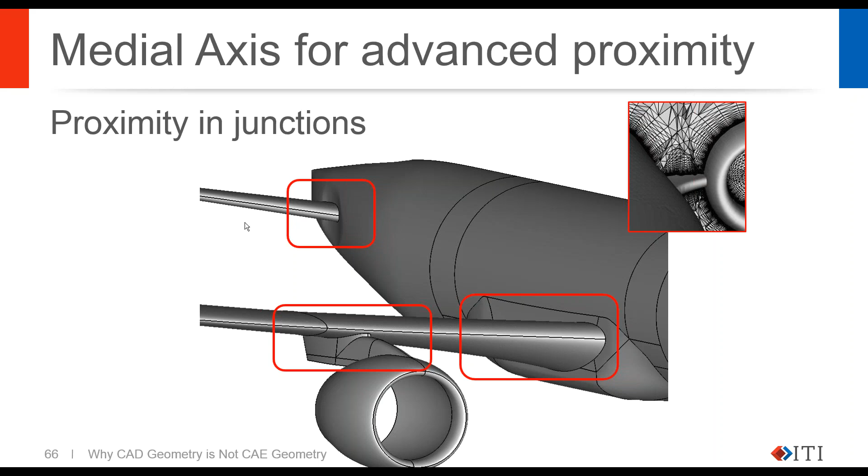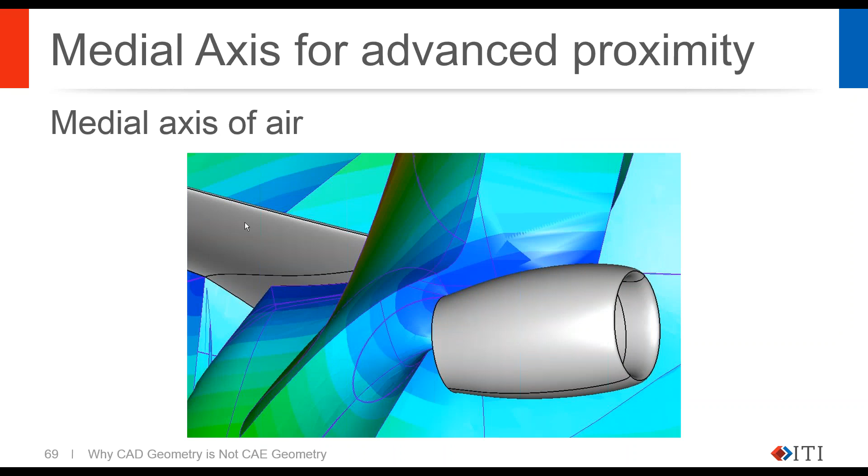And around the pylon nacelle junction, you can see how complex the medial axis is, but it tells you exactly how all those pieces of the CAD model relate to each other. So what's opposite what, how far away is something from something else. So given that very rich source of 3D data, we can then construct a blocking around the skin of the aircraft, again, to a user-specified depth.

And then we construct this layer of simple blocks around the aircraft. Most of the blocks are simple cuboid blocks, so easily hex meshed. Others are 2.5D blocks, so if you can quad mesh the bottom, you can sweep them into a full hex block, or if you do a quad dominant mesh, you can sweep them into a hex dominant mesh.

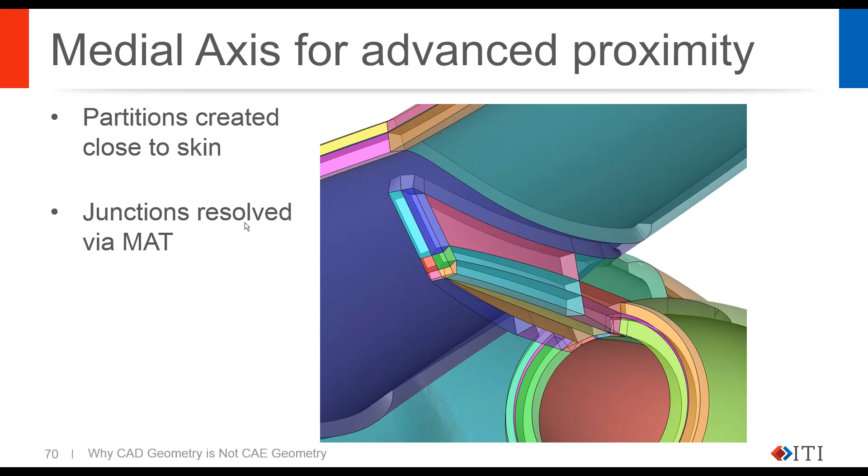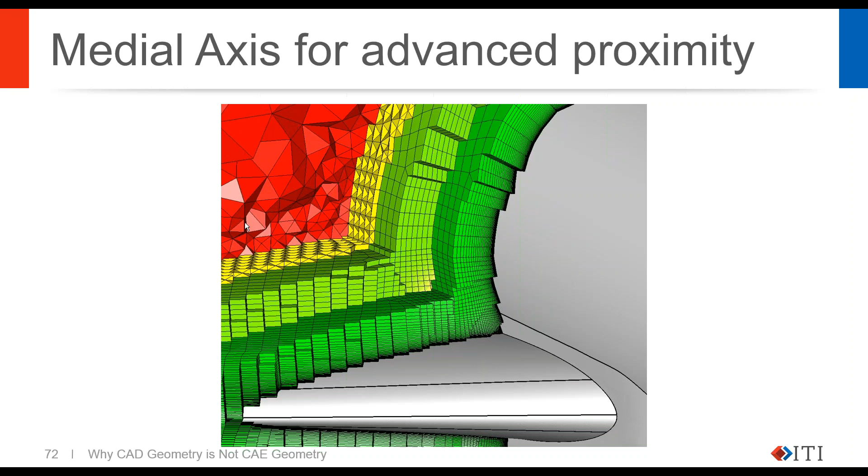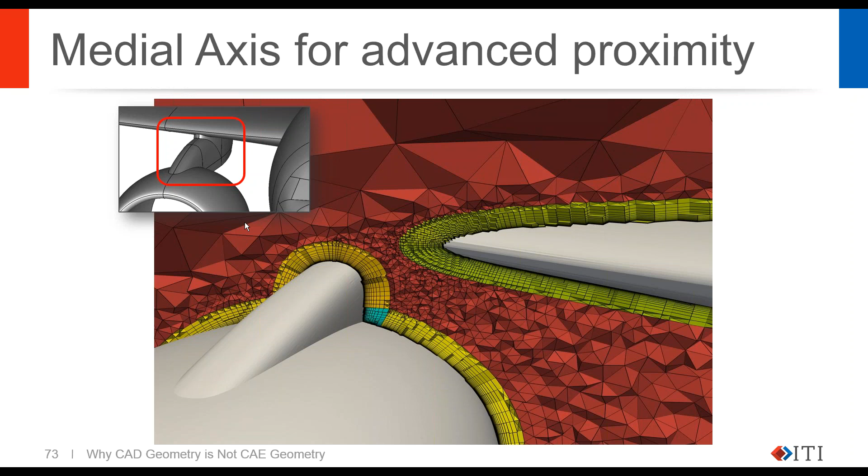Okay, so that really concludes that part of the webinar. The takeaway from this one is really that CAD geometry can be more than skin deep if you have something like the medial axis to give you that internal shape, representation, and proximity data. Given that, you can then do some really clever, really advanced 3D operations on the CAD geometry.

Okay, so just to wrap up, going back to the beginning and asking the question: are we there yet? As far as geometry goes and computers, there's been some huge advances since this sort of thing back in 1982 to this sort of thing this year. In terms of computer graphics, movies, visualization, we've made huge advances. We can fool ourselves into believing all sorts of realities now through computer generated graphics.

But I still ask myself, is this thinking? Are they really thinking? Are they solving big, hard questions for me? Or are they just fooling my eyes into seeing some reality that doesn't exist?